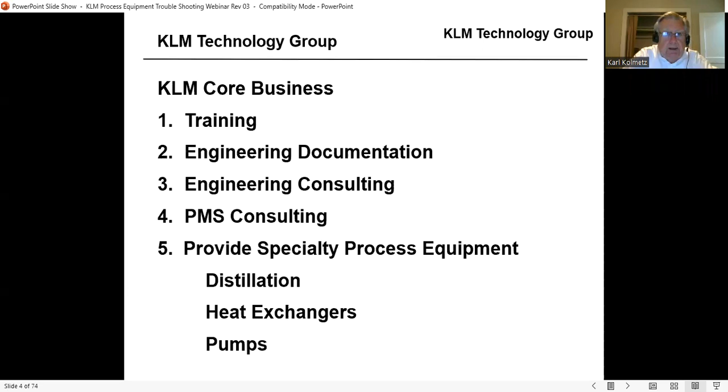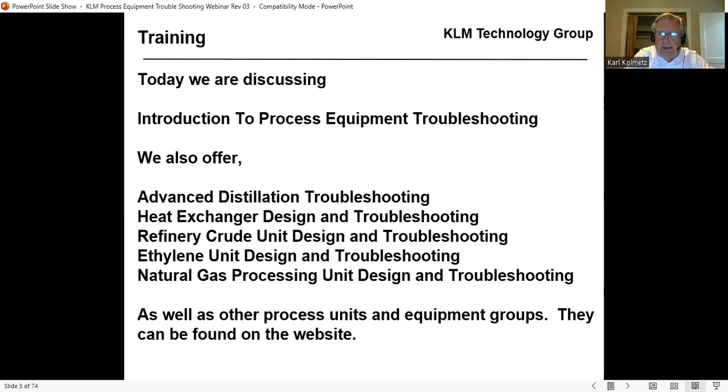What we're talking about today is some of the specialty equipment that we help provide. Today we're discussing an introduction to process equipment. We also offer other training courses: advanced distillation, heat exchanger design, refinery crude unit design, ethylene unit design, natural gas processing design, as well as other process unit and equipment groups. They can be found on the website, klmtechgroup.com. So what's our agenda today?

Safety, sustainability, distillation, heat exchangers, pumps, Q&A. Each one of these topics we've covered in our bi-monthly magazine with our great authors. We've been publishing for 7 years. I'm very honored that an amazing amount of people read the bi-monthly magazine. We publish it in multiple places, and we have great authors. If you're interested in writing an article, send us an abstract, and we'd be happy to help you publish in Engineering Practice Magazine.

Safety. First thing on the agenda, safety. HSE is the number one concern. No project or operation can be classified as sustainable, optimized, or excellent unless it's done safely, healthy, while minimizing environmental impact. We've made great improvements in safety in the last 50 years, and so everybody's really happy. We've really done great in HSE.

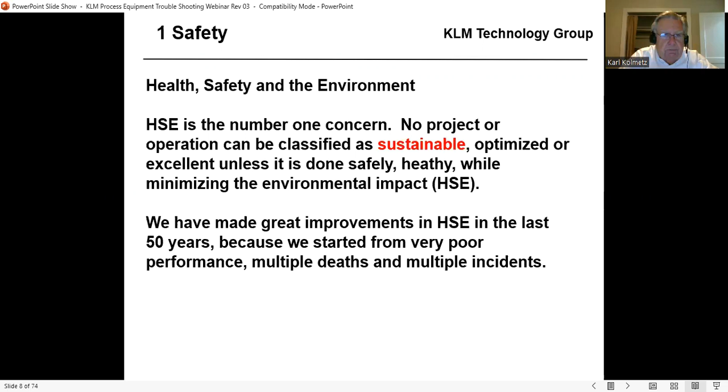But we started from such very poor performance. In the 70s, we had multiple deaths and multiple incidents, and we think we're doing so good in safety now. So we've gone from maybe an F, a failing grade, to an average C grade. We've done well, but there's still great opportunities for improvement. So we've come from such a poor place to where we're maybe an average student.

The parents are happy, but not really. We shouldn't be happy with C grades. We've done well, but there's still great opportunities for improvement. Let's continue to improve the efforts. HAZOPs—my complaint about HAZOPs is there's typically not enough senior people there. KLM has senior engineers with over 35 years of equipment design and operation experience who can review your operation and improve your health, safety, and environmental performance. So we've gone from an F to a C, but I still think there's work to do on safety.

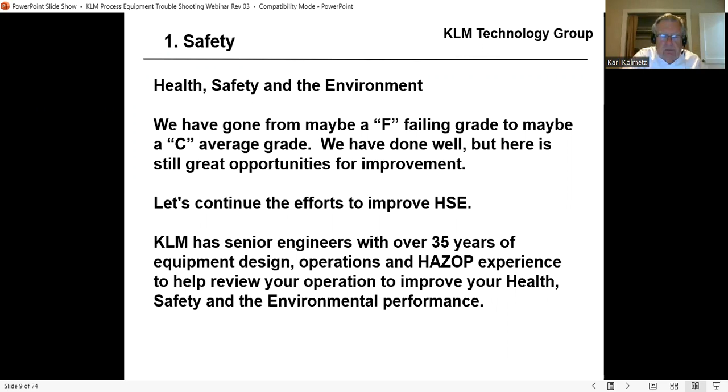Sustainability, process equipment troubleshooting. So let's talk a little bit about sustainability. That wasn't nearly enough about safety.

Sustainability is a societal goal that broadly aims for humans to safely coexist on planet Earth over a long period of time. The quality of causing little or no environmental damage and therefore able to continue for a long period of time. So these are some definitions of sustainability.

So what are some sustainability buzzwords? Green energy, which is wind, solar, and hydrogen. Electric cars. Blue energy, which is obtaining energy from the sea. Renewable energy, renewable kerosene and diesel, biodiesel, recycling, and conservation.

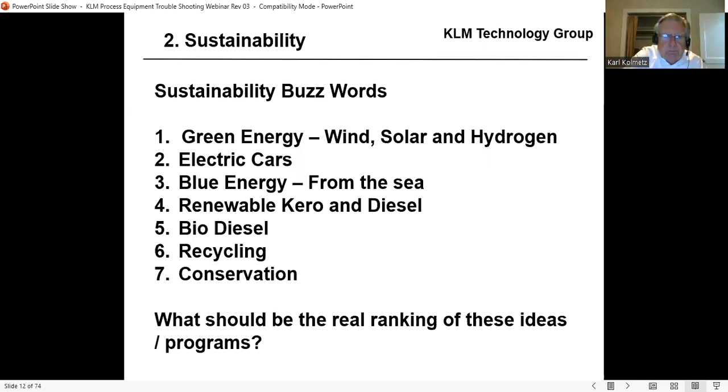What should be the real ranking of these ideas or programs? Well, I can tell you my opinion. How should these be ranked? So let's go back to the definition one more time. Sustainability is a societal goal that broadly aims for humans to safely coexist on Earth over a long period of time.

So in my view, sustainability, safety has to be number one, and I said it in the safety section. Number two has to be conservation. The bottom line is use less energy. And as engineers, that's our job, to design plants to reduce energy, use less energy, use less feedstock. If we use less energy and less feedstock, I don't need as much green energy or blue energy.

So to me, number one is safety. Number two has to be use less energy. All through this presentation, I'm going to talk about distillation, pumps, and heat exchangers and how to use less energy on each one of them.

Recycling, very important. Then green energy: wind, solar, and hydrogen. Blue energy from the sea. Renewable diesel and kerosene and biodiesel. And I put cars last because it's got some question marks beside it.

Every real engineering study that I've seen says we don't know the impacts yet on electric cars. You've got mining for the battery components, we've got battery recycling, we've still got to produce the electricity. So there's a whole big question mark: how sustainable is electric cars?

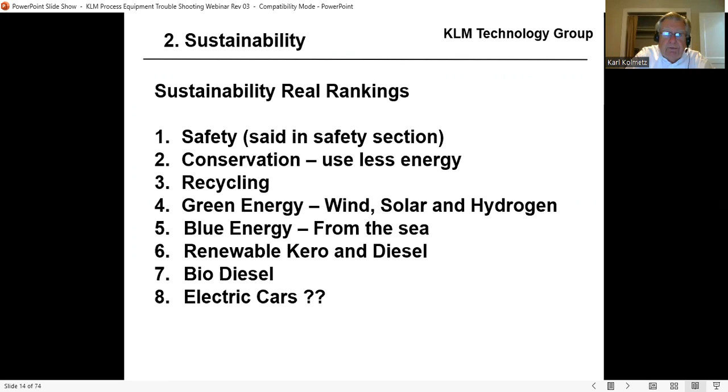But currently, green energy and electric cars tend to be the two hot things that we're talking about. Number one has to be safety. Number two has to be, let's just use less energy. Recycling, green energy, conservation is important.

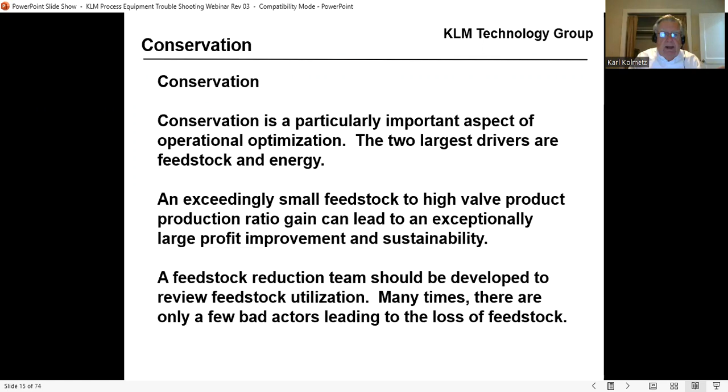Part of any process plant optimization, the two largest drivers are feedstock and energy. An exceedingly small feedstock reduction to high value products can lead to exceptionally large profit improvement and sustainability. If I use less feedstock and I produce high value products, that's important. For most plants, you should have a feedstock reduction team. Many times only a few bad actors are leading to the loss of feedstock to high value products.

Energy should be tracked weekly and monthly. Total energy should be tracked, energy per ton of high value products. The industry standard, every time I say this, people are surprised, the industry standard for major companies says energy is reduced 1 to 3% per year. What is your plant's current performance? The major companies are reducing energy 1 to 3% per year.

When I go to most plants, they have the same energy performance or they're getting worse. The best performing plants see yearly reductions of greater than 3%. And how do they do that? Well, I'm going to talk to you today in how they do that.

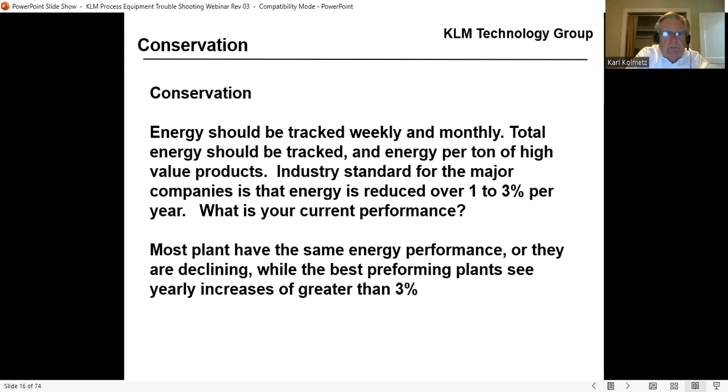So part of this presentation is how do you improve your energy, which is the main part of conservation and sustainability. Energy is a function of several items. Equipment design: I can design distillation equipment that is 10% more efficient.

Typically we buy vanilla type equipment. We don't typically buy the best efficient equipment because of cost, but they don't realize it's a small amount of cost difference. You make a huge amount in equipment, you make a huge amount in energy savings, plant reliability, motor power factors.

I was consulting for an EB styrene plant. One of the things when I go consult, I go back and track their energy for several years. So I'm at this EB styrene plant and the energy trended up over the last 5 years. And they had just bought low energy catalyst. I'm going, guys, something's wrong with this picture. You bought low energy catalyst and your energy's tracking up.

So I'm in the meeting and I'm asking, we're in Asia and Asians don't say much in the meeting, so nobody said a word. After the meeting, the electrical engineer comes to me and says, well, why energy's tracking up is we're buying very low cost motors, which have very poor power factors.

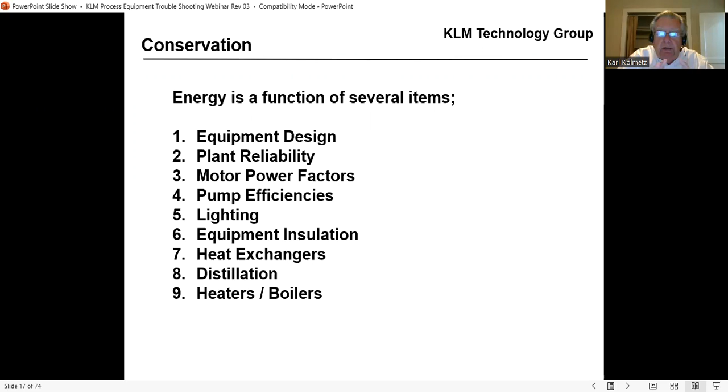So the first thing we need to do is look at energy. The best way to be sustainable is to use less energy. If your energy cost is increasing, you need to put together an energy reduction team. Just forming the team normally produces an energy reduction. It's amazing what increased focus can accomplish.

You need to review equipment design, particularly your heat exchangers, heaters and boilers, and distillation equipment to help reduce energy, often by just adjusting operating parameters.

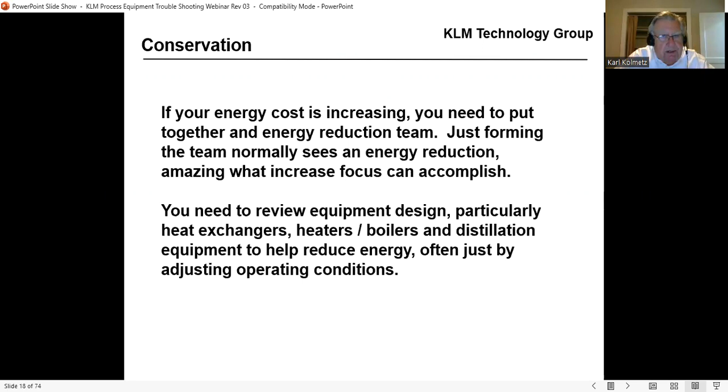Each time you replace a piece of equipment, you should improve the energy performance of that equipment. Don't just replace in kind. Go ahead, buy a better pump, buy a better motor. Every time you open your distillation column to inspect them, buy better trays. A 1 meter tray costs $1,500. It's not crazy money.

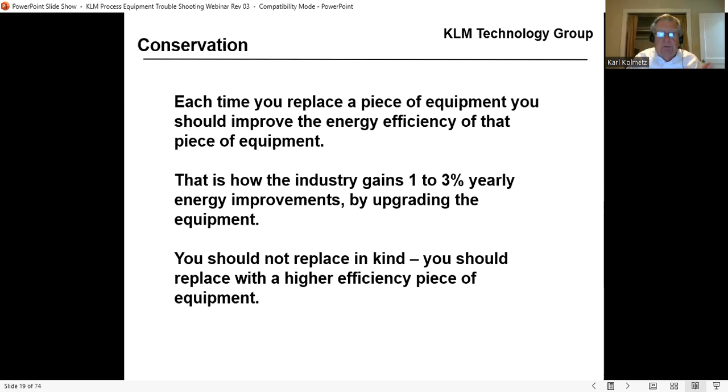This is how the industry gains 1 to 3% yearly by upgrading the equipment. You should not replace in kind. You should replace with a higher efficiency piece of equipment. We want to be sustainable. It also saves you money. So it's a double win - I make more money and I'm sustainable.

Your team should be taught to specify replacement equipment for increased energy efficiency, often with only a small cost increase. That's why they didn't do it from day one. But it has a huge return on investment, particularly when the price of natural gas is kind of high like it is now. Sometimes there can be a 3 to 4 month return on investment.

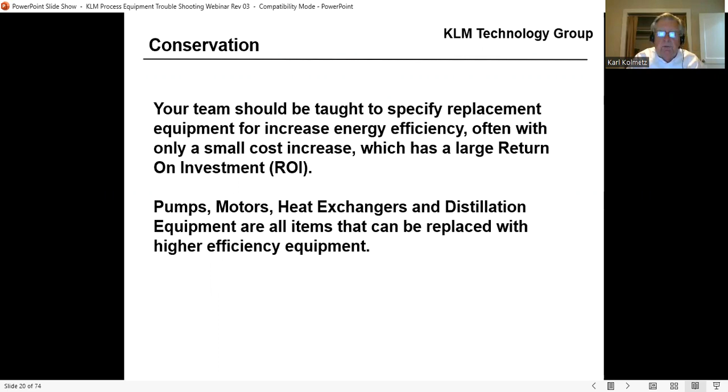Pumps, motors, heat exchangers, distillation equipment are all items you can replace with higher efficiency equipment. So for years we've lost the battle on this delta - for 3% more, I can buy a high efficiency piece of equipment. Back when natural gas was cheap, it didn't make sense. Today, when the price of natural gas is very high, when we're trying to conserve and be sustainable, that 3% now has a very large return on investment.

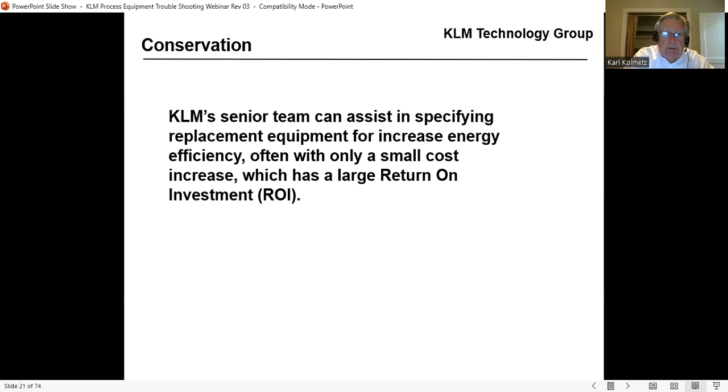KLM's senior team can assist you in specifying replacement equipment for increased energy efficiency, often with only a small cost increase, which is a large return on investment. So one thing you might want to do is have somebody look at your specifications when you're going out for bids. You need to specify a certain power factor for a motor, a certain efficiency for a pump, and in distillation a certain efficiency and a certain fouling resistance. These are things you should have in your specifications when you go out for bid. It's going to cost you a little more money, but it's going to pay back very quickly.

So we've talked about safety, we've talked about sustainability. Let's jump into distillation a little bit.

Distillation troubleshooting. Do the simple checks first. Look at temperature and pressure compositions. Let's talk about troubleshooting tools, and then let's talk about some tower inspections.

So you're going to call me to come do a troubleshooting. You've got a problem tower. The first thing I'm going to do is the simple checks first. Then I'll look at temperature, pressure, and compositions. I'm going to run a simulation, look at some troubleshooting tools, and then we might have to actually open up and inspect the tower.

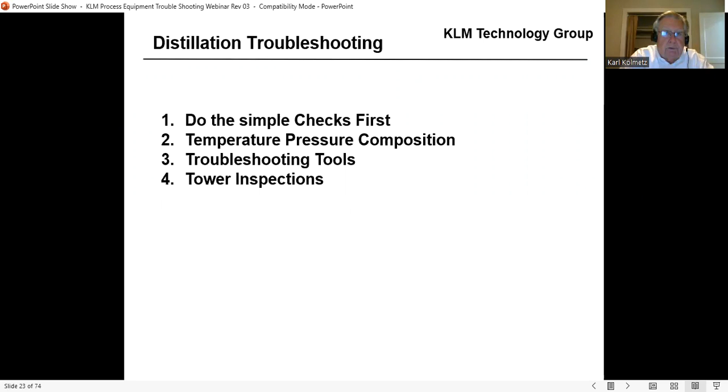So these are some distillation troubleshooting tools, but do the simple checks first. As engineers, we want to do a simulation first, but many of the issues with distillation are instrumentation related.

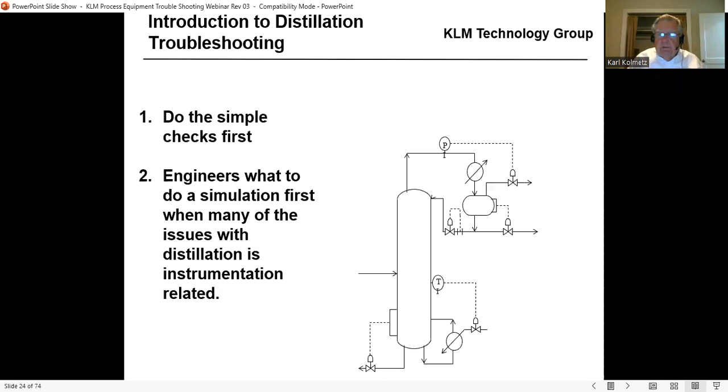So the first thing we want to do is verify the tower levels. We work with the operators to confirm the level. We go up on the overhead receiver. There's a sight glass right here. We can either open the overhead storage control valve or open the reflux, and this level should track down. We can go to this sight glass here and have them open the bottoms to storage, and this level should track down.

What percent of the time would you guess that when you go to a tower troubleshooting, they cannot find the tower levels? So I show up, and the first thing I'm going to go do is look at these two levels. What percent of the time would you guess they don't know where the levels are?

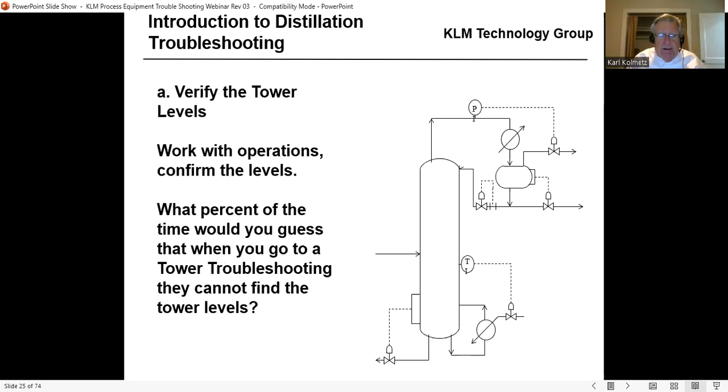Now everybody thinks levels are easy. Levels are not easy, and they're not very accurate. We're going to talk about that. In my career, 20% of the time when I show up and the tower's not working, it's always the tower bottoms level. If the tower bottoms level is higher, the reboiler will not function.

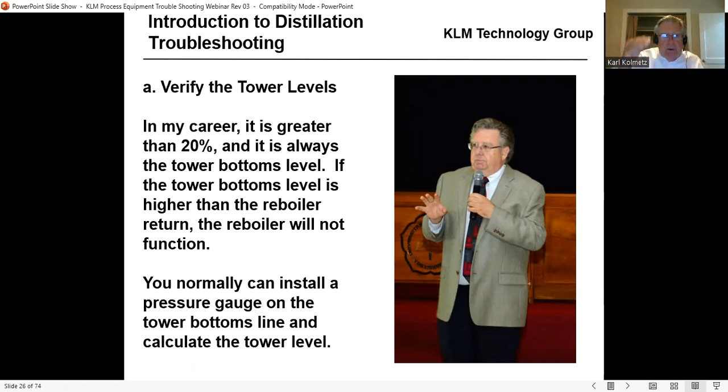What I normally do is put a pressure gauge on the tower bottoms line and calculate the tower bottoms level. You can take rho g h, and I can tell you how high up in the column it is. Usually it's above the sight glass, and they don't really know where the level is. So I put a pressure gauge on the tower bottoms line, calculate the tower bottoms level, how high it is, and we start lowering it down. When we get it below the reboiler return, the tower sometimes will start working.

So the challenge is the tower bottoms may be frothy and at a higher temperature than the level leg, because of Bernoulli's equation. If you go to a hot system, what's in the column is always higher than what's in the sight glass - can be 10 to 15%, I've even seen it 20% higher. So levels seem easy, but they're really not. If you've ever seen a movie of what the inside of a distillation column looks like, it's frothy, and that level in the column is going to be much higher than the level in the sight glass.

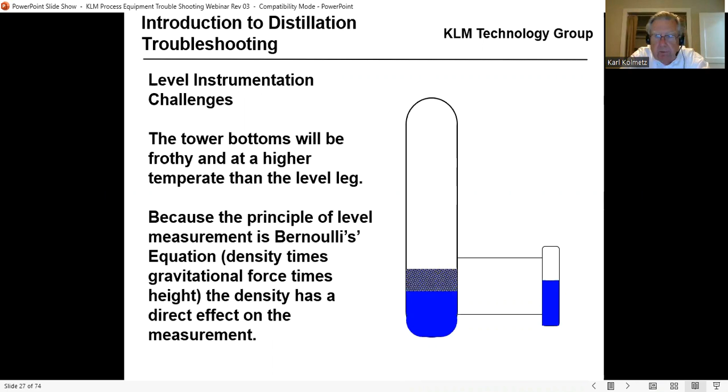Next thing I want to do is perform a tower pressure drop. If the levels are okay, let's perform a tower pressure drop. There are normally 3 places I can put a pressure gauge: one at the top of the bottoms level right here, one right here, and one on the overhead line. So I can put a pressure gauge in 3 places on this column.

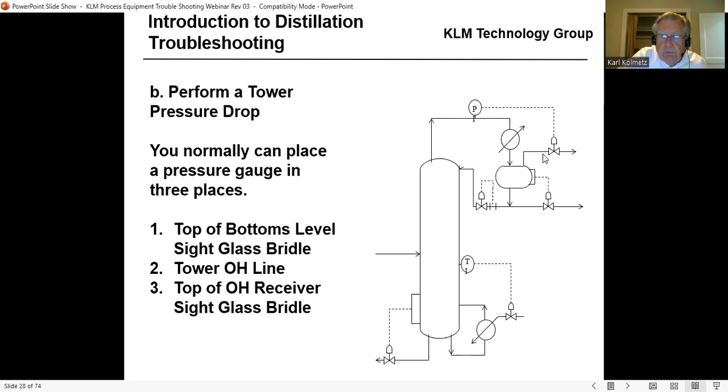This measures the pressure drop across the column. These two measure the pressure drop across the overhead condenser. You should use the same gauge, and one person should read the gauge - everybody reads gauges differently.

Typically, I go read the gauge. If I drop the gauge, you start over - you get a brand new gauge, go to the instrument shop, get it calibrated, carefully install it in the 3 places, and the same person reads the gauge.

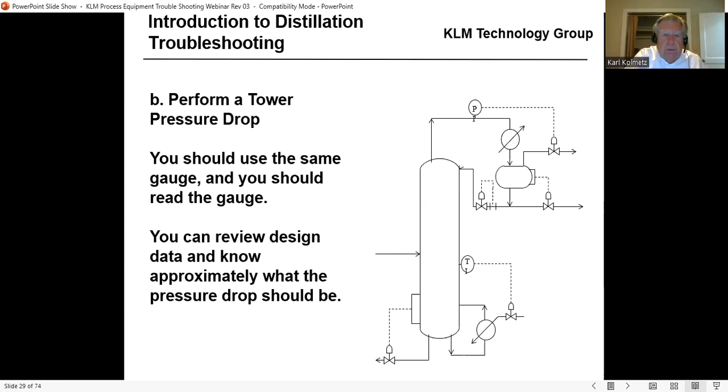In advance, you can review the design data and know approximately what the pressure drop should be. Suppose you have 30 trays and you're expecting about a 3-pound pressure drop, 0.2 bar. What does it mean if you have a high pressure drop across this column? Well, it could be fouling, could be flooding - your tray might have dropped down on another tray. What does it mean if you have very low pressure drop? Well, all the trays could be laying in the bottom of the column.

What is the normal design pressure drop of a heat exchanger? It should be about 5 pounds, 0.35 bar.

What does it mean if you have very high pressure drop across this heat exchanger? Well, that could be fouling. What does it mean if you have very low pressure drop across this heat exchanger? Well, what that normally means is you really don't have very much reflux, and this reflux meter may not be telling you the truth.

So this pressure drop can tell you a lot. It can tell you if the trays are in place, if the heat exchanger is fouled, or if maybe you don't have enough reflux. So perform a tower pressure drop.

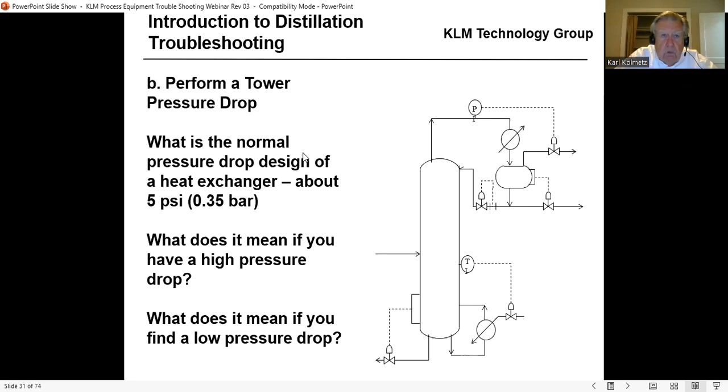In my career, about 20% of the time you can identify the problem with the tower pressure profile. Once you've identified there's a problem with the column, you can scan the column to get a better picture of what's happened inside. So run a pressure drop, and if it's much higher or lower than design, go get a column scan.

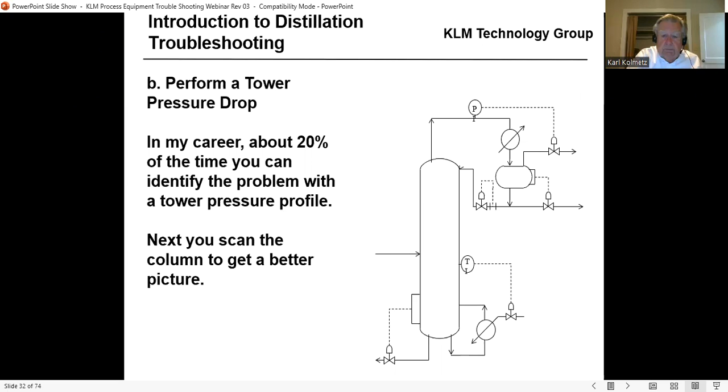Next thing I want to do is perform a tower temperature profile. You can take a temperature gun and survey the tower temperatures - the feed, the bottoms, the overhead temperature, the reflux temperature, the cooling water in and out, and all the others.

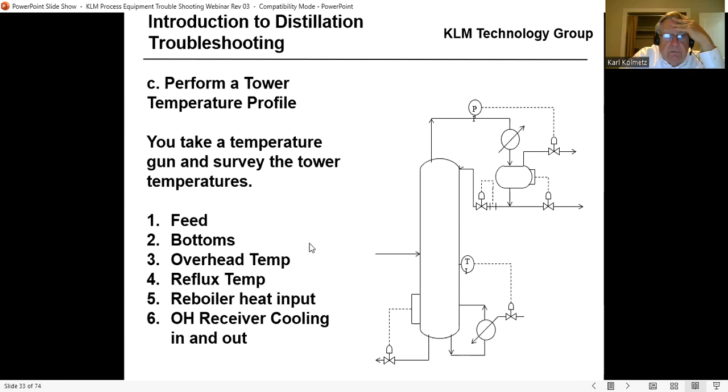What happens if your feed is much hotter than design? What can happen if it's much colder than design? Most of the time, if I'm designing a column, I want to heat this feed so 50% goes up and 50% goes down - about 50% flashed. If it's much hotter than design, I can flash a large part and flood this part of the column. If it's much colder, I make too much liquid and can flood this part of the column. So it's important that your feed be roughly what the designer designed it for. If he designed it for low temperature, he probably made these trays a little larger, or he should have.

What happens if your reflux is much hotter than design? If my reflux comes in hot - what I really want is for it to come in at a certain temperature, cool the vapor coming up, and go down the column. If it's hot, it comes in and just recycles through this overhead condenser and even makes it hotter.

What happens if your reflux is much colder than design? Well, if it's too cold, I can actually flood the top of the column here.

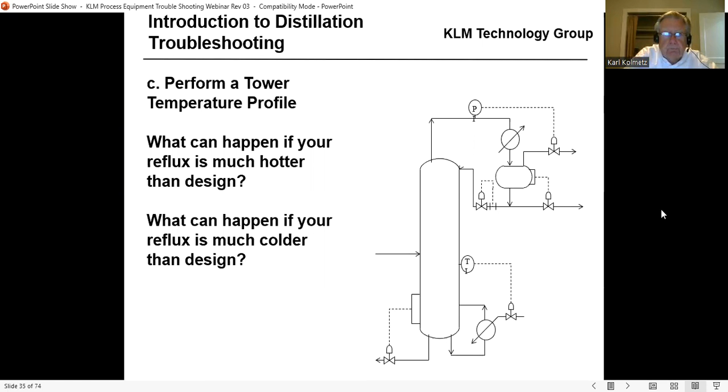What does it mean if your cooling water in and out are the same temperature? This can mean two things. Number one, this heat exchanger is fouled. Number two, it can mean, again, you have no reflux.

So we had a situation - I worked in a Houston refinery for 16 years, and we had a debutanizer column on the FCC, which took the C4s out of the gasoline. So it was a very important column. We did a turnaround, and coming out of the turnaround, the column no longer worked. So they did a whole bunch of troubleshooting.

They brought in a whole group of people, and it was decided maybe they needed to retray the column. So they shut the FCC down. They retrayed the column because they weren't making on-spec gasoline, which is kind of important, and started back up with the new trays. It still was not on test.

So I got interested in distillation. My boss asked me to go down and look at this column, so I went down and looked at it. A young engineer was walking around, and he noticed that this temperature and this temperature were the same. He also noted this control valve was not open very much.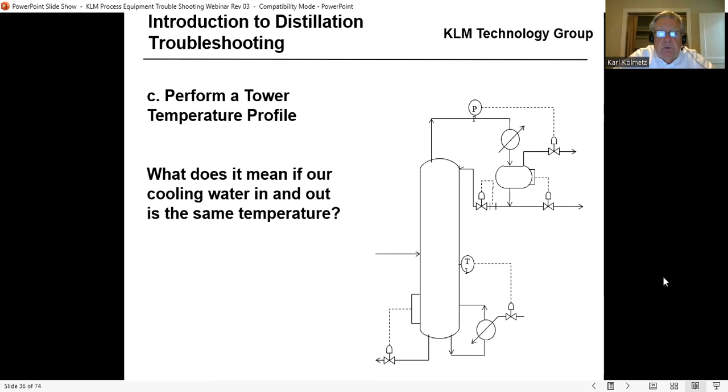So it's very important that you do some troubleshooting. Do the simple checks first - verify the levels, perform a pressure survey, perform a temperature survey.

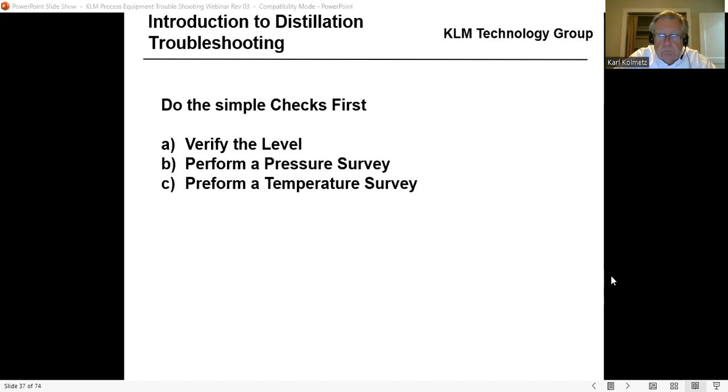All right, troubleshooting. So I've done the simple parts. I've looked at the feeds, I've looked at the levels, I've looked at the temperatures, I've looked at some of the flows. Then you go sample the feeds.

Has the feed changed from the design? Build a mass balance. If it's not within 2 to 5%, get your meters calibrated. A typical normal orifice plate is only 2% accuracy. The current micro motions are much better, but a normal orifice plate is only 2%, so try to build your mass balance to within 2 to 5%.

Then you go to performance simulation. Has the temperature and pressure profiles changed? Go look at hydraulic profiles.

I talked to you that we'd probably come back later and do a second part to this. In part 2, I'll come back and talk about hydraulics. I may do that in November.

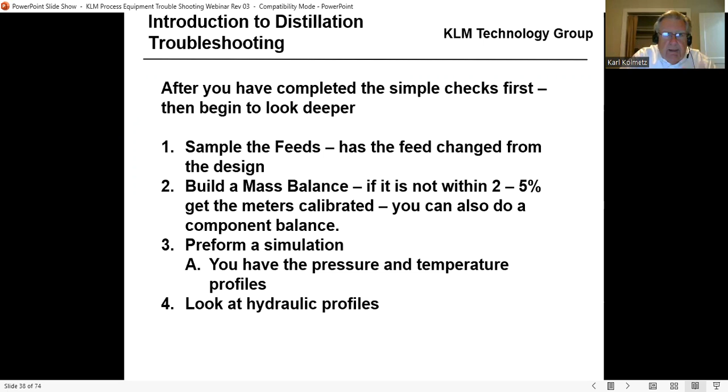Do the simple checks first: sample the feeds, build a mass balance, perform a simulation. So these are troubleshooting tools.

KLM is recognized as a leader in distillation equipment design, operation, commissioning, and troubleshooting. Typically a company will have a design guy, a guy that troubleshoots it, and a guy that commissions it - they'll typically have 3 different people.

I've been very fortunate. I've gotten to do design, operation, and troubleshooting. So I will show up and bring my 40 years of experience to you. Typically a company might have to send 3 people to do troubleshooting, whereas I'm probably going to bring that much experience with me.

We can provide process studies, we can do engineering operations trainings. Really each one of these subjects should be a 3 to 4 day class - distillation, heat exchangers, and pumps. Each one of them should be a 3 or 4 day class.

Tower inspections - I've probably climbed through 100 towers in my career. Distillation replacement equipment - we don't replace in kind. If you're going to replace equipment, always replace with something more efficient. Commissioning assistance - me and my team, I've got a really good team in Malaysia, we will come and help you commission units.

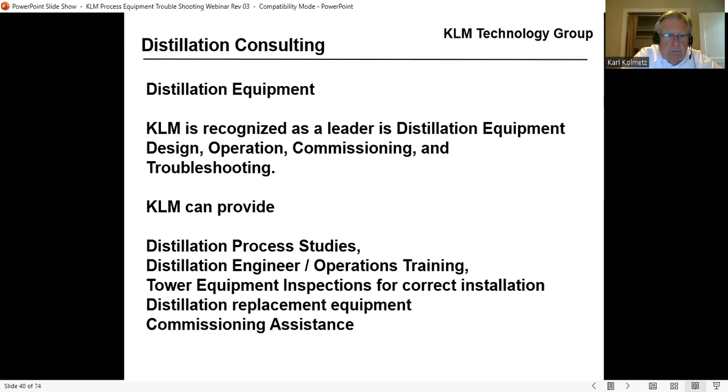What are the major equipment issues? Well, in my career, incorrect installation has been huge. If I don't install it correctly, it's not going to work.

The challenge is that very few people really know how they're supposed to be installed. I've actually gone behind the majors and corrected some of their mistakes. Even the major companies, major distillation companies, have installed them wrong.

Operation - what are equipment mistakes we make? We over reflux. I walk into most units and they're using too much reflux. If I'm using too much reflux, I'm using too much energy in the reboiler. And then high pressures - if I walk into most units, you can lower the pressure on most columns. If I lower the pressure, the relative volatilities get better, and you end up having less energy and better recoveries.

The third major issue is we buy low efficiency equipment. A 1 meter tray costs about $1,500. What costs the money in distillation is the foundation, the tower, the overhead lines, the overhead condensers, the pumps, the electrical, the instrumentation. That's what's expensive. What does the work is the tray. We want to save money on the tray - don't save money on the tray. Go save money on all the other pieces.

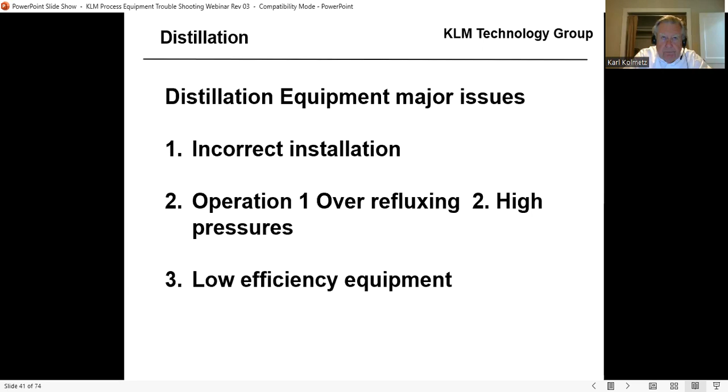Tower inspections - a large problem in many is incorrect installation, leading to loss of product quality, higher energy, and run length and plant reliability issues. So basically, if I don't install it correctly, I'm going to have loss of product quality, higher energy, and shorter run lengths, which can be a $1 million effect in a large plant. Not installing it correctly can be $1 million.

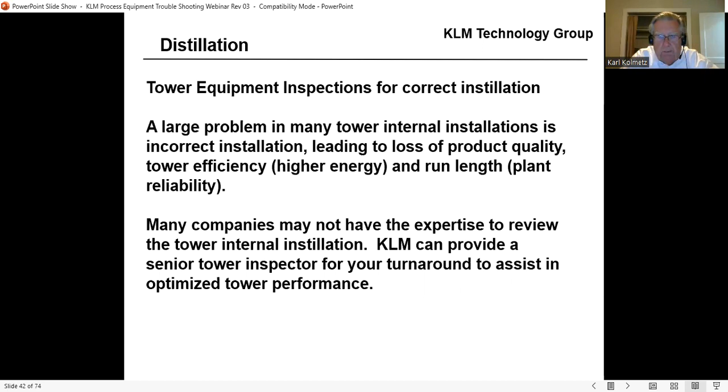Many companies do not have the expertise to review tower installations. If it's a large unit, I'm going to show up - I'll bring one of my senior guys from Malaysia with me to assist your tower performance. What are things we're going to look at? We're going to look at the downcomer clearance, the free area, top width, bottom width, all of these things.

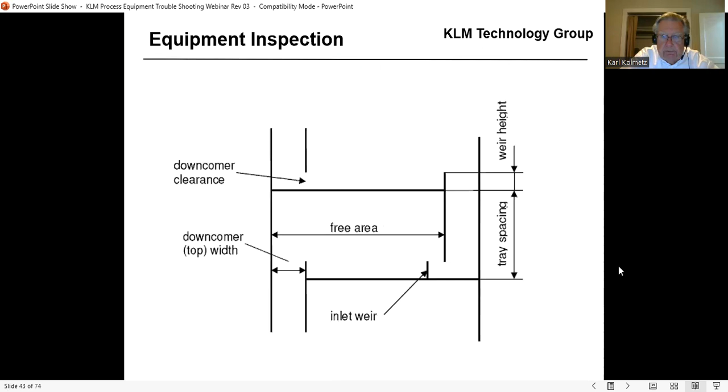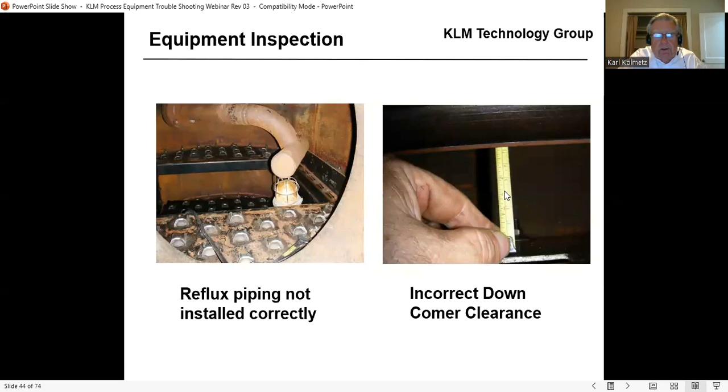This is my hand - I took this picture and I'm measuring the downcomer clearance. That's just something you've got to do.

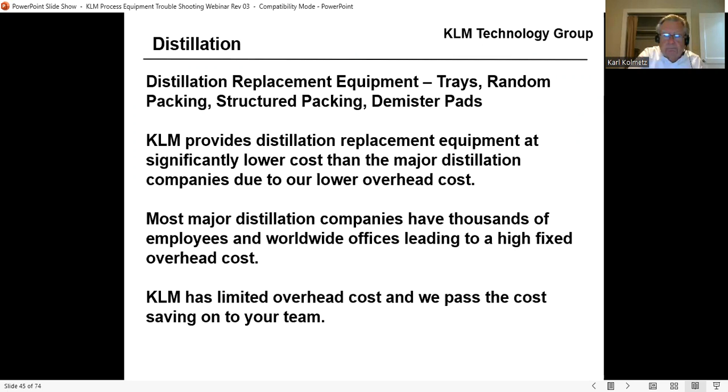Distillation replacement equipment - trays, random packing, structured packing, demister pads. KLM provides distillation replacement equipment at significantly lower cost than the major distillation companies due to our lower overhead costs. Most major distillation companies have thousands of employees in worldwide offices, leading to a high fixed overhead cost. KLM has limited overhead costs, and we pass the cost savings on to your team. We provide the same specification trays, random packing, structured packing, and demister pads, as well as a senior engineer, typically me, to review the selection.

If your current system has short run lengths, should we consider a more reliable replacement? Maybe a more fouling resistant or a stronger design. These are typical crude unit trays, and they should probably be a little more fouling resistant. These are not fouling resistant designs, and they're also probably not strong enough.

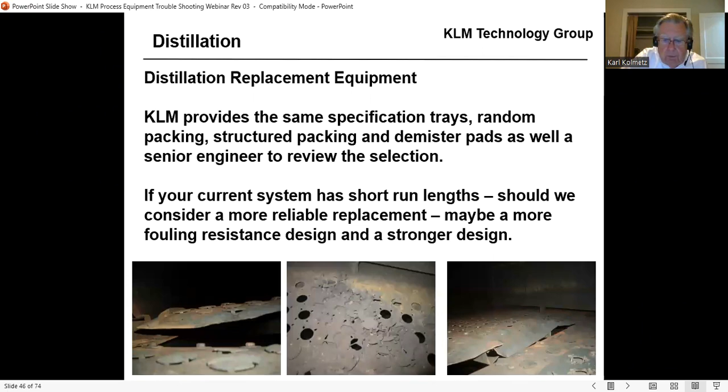Stronger and more fouling resistant designs are very important for random packing and demister pads that have high fouling failure rates. Alright, let's talk about this for a second.

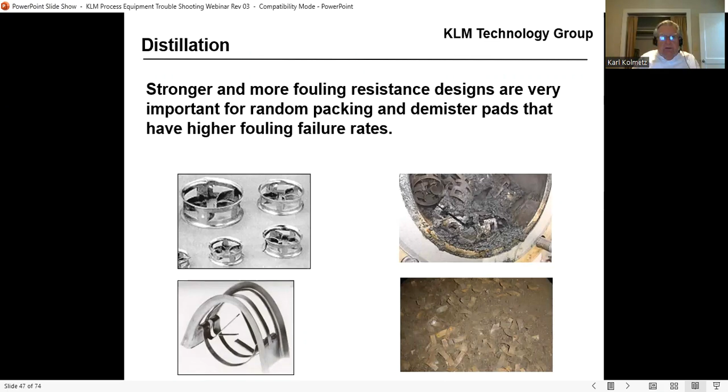Here's an ethylene plant case study. A plant in Malaysia opened their quench oil tower and found the random packing had disintegrated, causing very high pressure drop and fouling. Why did this happen? They obviously had some rings - that picture shows all the rings disintegrated, and the fouling happened because once the rings disintegrated, it acted like a filter for the coke fines from the ethylene furnace. Of course, you had a really high pressure drop, and you had to shut the column down. This is a $1 million problem for a large ethylene plant.

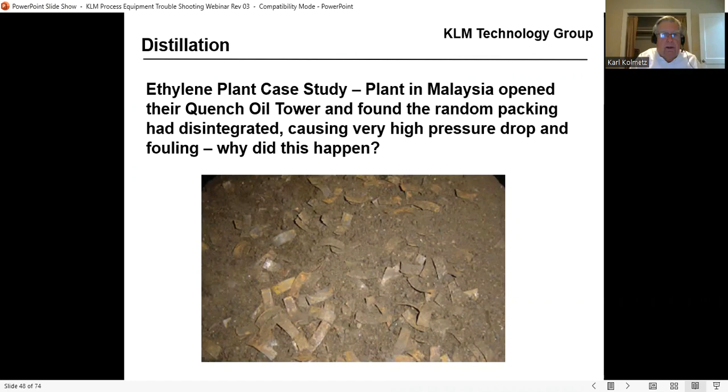One cause might be galvanic corrosion. The packing was stainless steel and the tower was carbon steel. Always consider galvanic corrosion when you're designing with multiple metallurgies.

So if I've got a quench oil tower or a quench water tower, you probably don't want to put stainless steel packing with a carbon steel wall. If you do, this is what's going to happen.

The licensors, the very first time you buy the column, will typically put carbon steel packing in, and then the vendors will come back behind them and sell you stainless steel. So typically the ethylene vendor's first batch of packing will have a carbon steel wall and a carbon steel packing. When you replace it, the vendor's going to try to sell you stainless steel. Unless you understand galvanic corrosion, it's not going to last very long.

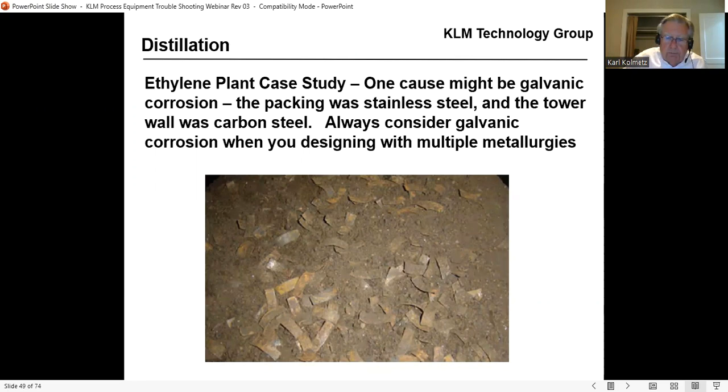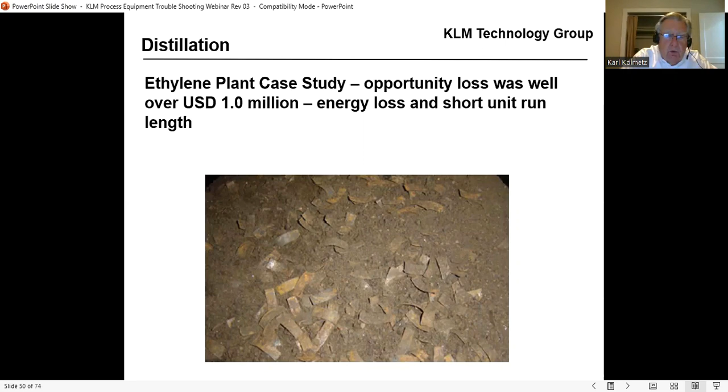Opportunity loss was well over $1 million for this ethylene plant. You had high energy losses and short run lengths. So you need to think about galvanic corrosion whenever you're doing mixed metallurgies. If you have water, low pH or high pH, you're going to have galvanic corrosion.

Gas processing case study. This is a picture of fouling in an amine column. This tower was packed with Pall rings. Pall rings have low efficiency and are not fouling resistant. Why would you pick a low efficiency ring with high surface area in a fouling system?

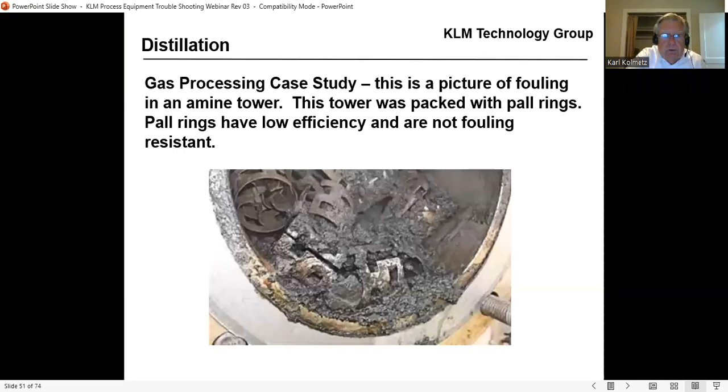So this was a poor choice of random packing. The opportunity loss is not as large as the ethylene plant, but why would you choose a low efficiency and a not fouling resistant packing?

Typically this is IMTP type packing. It has been tested independently and has much higher efficiency. It might even be the same cost, might be a little more, but you're going to get much higher efficiency with IMTP. Amine systems are going to foul no matter what, but you might as well pick a high efficiency packing. Don't pick a low efficiency packing.

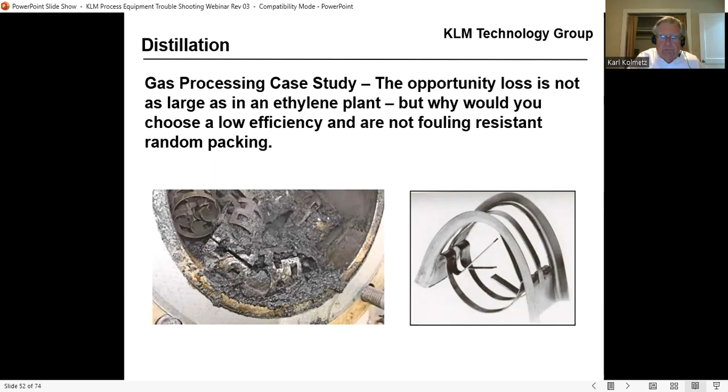For demister pads, it's important to understand the failure cases. KLM can provide equipment designed stronger with higher fouling resistance and longer run lengths. We quote a lot of demister pads. And I have a question.

Why should a caustic tower, which has a carbon steel shell, have a stainless steel demister pad? Most every caustic tower I go to, they're going to have a stainless steel demister pad. It probably should be some kind of polymer instead.

We know stainless steel and caustic are not compatible. It's just going to leave. You're going to get galvanic corrosion extremely bad. You're going to get caustic stress corrosion. So again, if I'm going to specify a caustic tower, I'm not going to specify a stainless steel pad, but most caustic towers I walk up to have stainless steel pads. So people aren't understanding this metallurgy, caustic versus galvanic corrosion, caustic attack. So make sure.

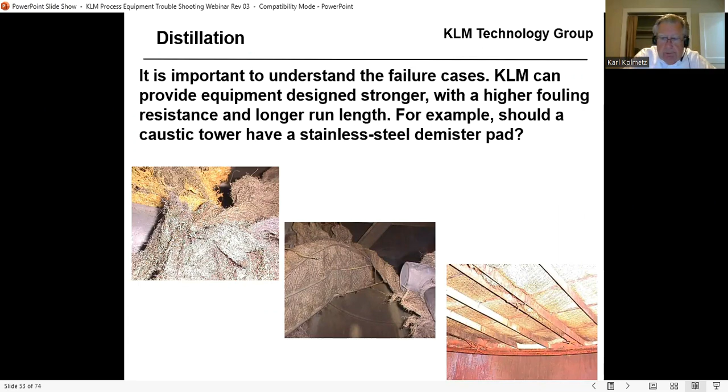The other thing I would do when I design a demister pad: the bottom 100 millimeters, I'm going to have a little thicker wire with larger openings. The top of the demister pad, I'm going to have very small openings. The bottom will have a little bigger mesh so it'll last longer, and that doesn't cost a lot of money.

So don't put stainless steel in a caustic tower. And if you are going to buy a demister pad, put the bottom 4 inches, about 100 millimeters, with bigger mesh, and the top mesh thinner. KLM quotes a lot of demister pads, we've got a really good team to do them, and we try not to make the metallurgy mistakes, and try to make it more efficient and last longer.

Okay, so I got some more questions. Let's see.

Recording also, I'm in the office, I'm not able to listen properly. Okay, what we'll do, we're going to put this up on YouTube when we finish.

Question: should we install an impingement baffle on the reboiler return? Is that applicable? The impingement plates reduce erosion caused on the side of the shell. Yes, I would. I like impingement plates on the reboiler return, particularly if you're causing erosion on the side of the shell.

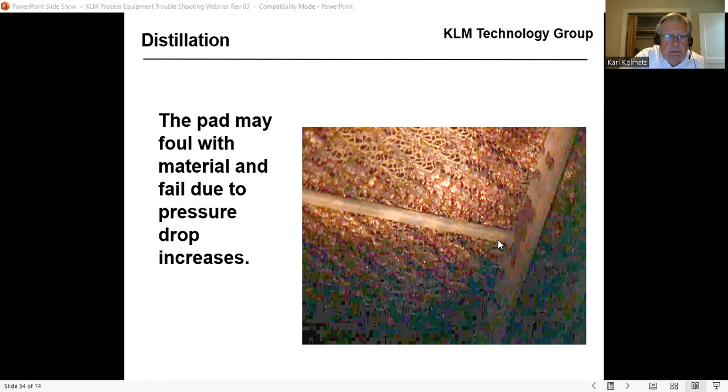Have you ever had a desalter trip due to high amp draw because of high conductivity of crude? We see in our plant, crude comes in with high emulsion, just wondering. Typically, that's normal - you have to control your pH so you can keep the conductivity down and keep your emulsions down.

I have a whole one hour presentation on desalters, and I've thought about doing a webinar on desalters with a certificate of attendance.

What you do to avoid galvanic corrosion in the columns is you use the same metallurgy. So if I have a stainless steel column, I can use stainless steel packing. If I have a carbon steel column, I have to use carbon steel packing. Now, the vendor doesn't want to sell you carbon steel packing because it's a pain for him, but he can do it. If he won't do it, KLM will provide you carbon steel packing.

It's not as important if you don't have water, if you don't have polar issues, because you need that ionics to get galvanic corrosion.

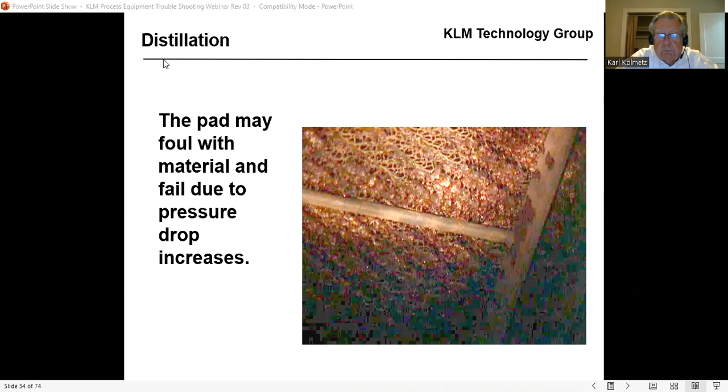Keep going. Distillation requirement: if your current system has acceptable run lengths and lower fouling potential, you should consider a high efficiency device to improve energy. If you replace your trays, heat exchangers, pumps in kind, you will not be gaining the 1 to 3% energy reductions, increased plant reliability, and product quality.

For distillation, we can give you 10% more efficiency, so you use 10% less energy. We can also give you better product purities. And trays are not expensive - trays are about $1,500 for a 1 meter tray.

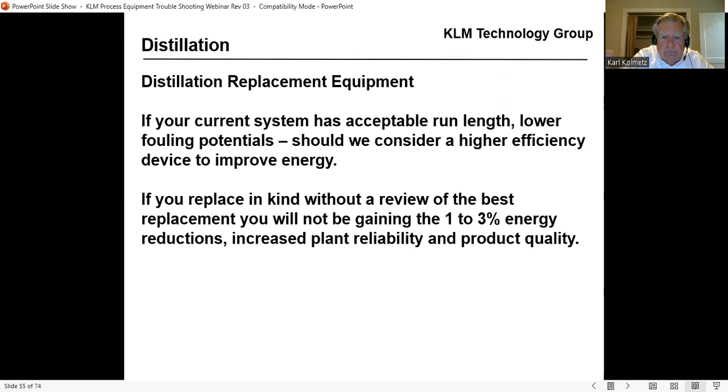Compared to a conventional sieve deck, which most of you have, a high efficiency tray can see greater than 5 to 10% efficiency gains, as well as 20% capacity gains. Distillation can be as much as 50% of a plant's total energy, particularly in a refinery.

So if I can gain 10% just by replacing the trays, I can reduce the plant energy 5%. And it's not expensive - a 1 meter tray costs about $1,500. So this is a tremendous return on investment.

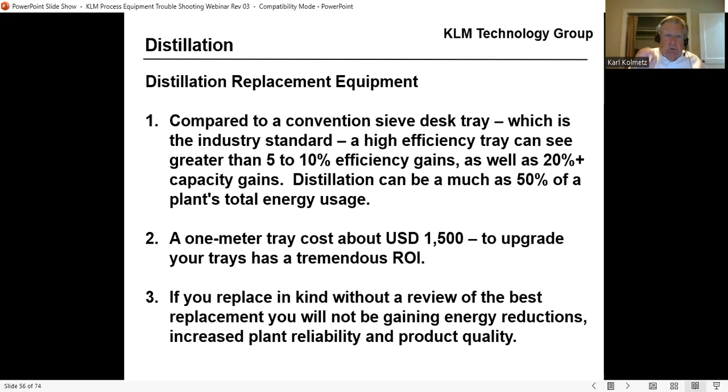If you replace in kind without a review of the best replacement, you'll not be gaining energy reductions, increasing plant reliability, product quality, and you won't be sustainable. So whenever you replace a piece of equipment, do not replace in kind. We've talked about safety, we've talked about sustainability, we've talked a little bit about distillation. I've not covered heat exchangers or pumps very much here.

I'm going to go through these quickly. We'll talk a little bit about heat exchangers, a little bit about pumps, and then we've got a few more Q&A questions. I've been answering the Q&As as you go along.

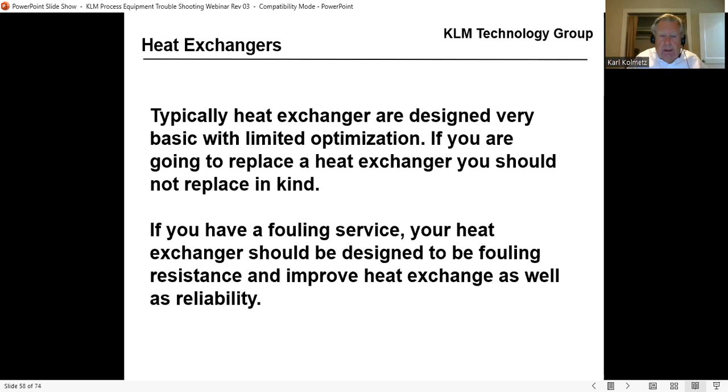If you have a fouling service, your heat exchanger should be designed to be fouling resistant and improve heat exchange as well as reliability. Almost every fouling service heat exchanger that I've seen is not designed very well, and I'm going to explain to you why.

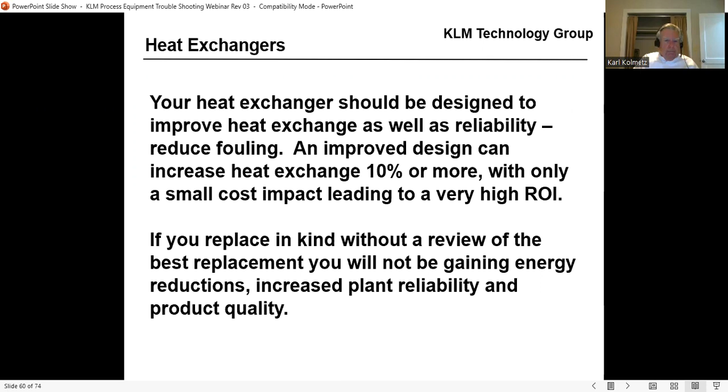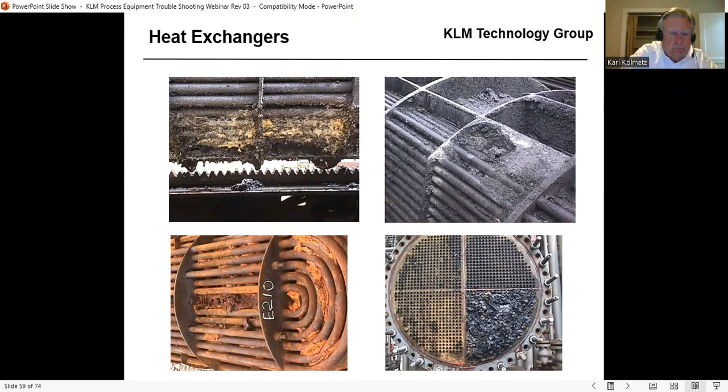So basically, we put baffles in for two reasons. Number one, support the tubes. Number two is to make this flow.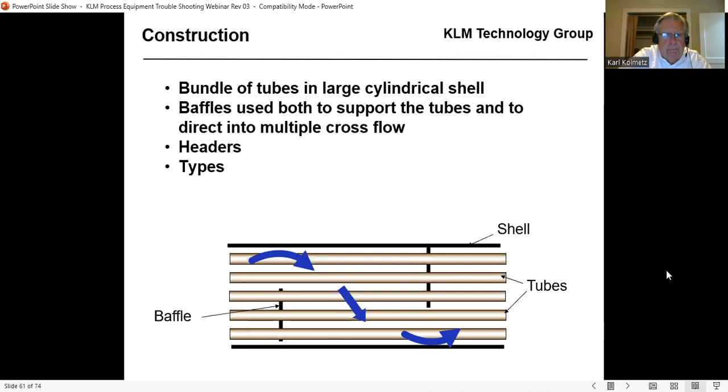But I can tell you, if it's fouling, I'm going to build all kinds of solids right here. So I want a small amount of flow through here, under this bottom, to remove those solids. At the start of the run, it's not going to be as efficient, but over the life of the run, it's going to be way more efficient. So that's kind of what these baffles are for.

And so I come here, flow goes under, flow goes over, but where the flow goes over, right in here, is a dead zone. If you've got high fouling, it's going to build up right here, right here, right here.

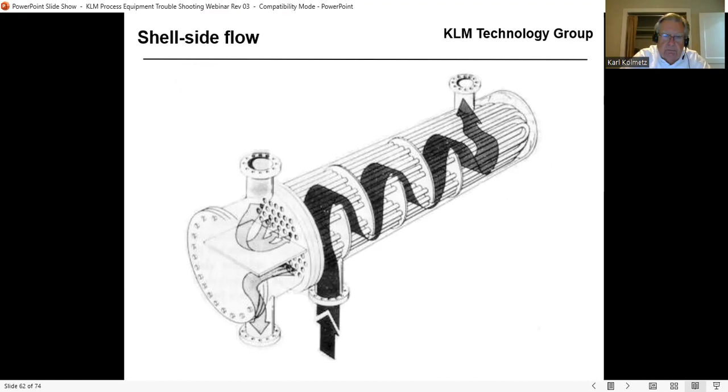And so the obvious answer is you don't design them like this. It's very important how you design the heat exchanger. That one heat exchanger picture obviously had 15 to 20% less efficiency, just from not designing properly.

These are ugly pictures, that's the only thing I know to say. Under this, I should have some V notches here, obviously. I know these are from an ethylene quench oil system. You know they're going to have fouling, you know they're going to have all kinds of tars, you know they're going to have fines, and you don't design traps for them.

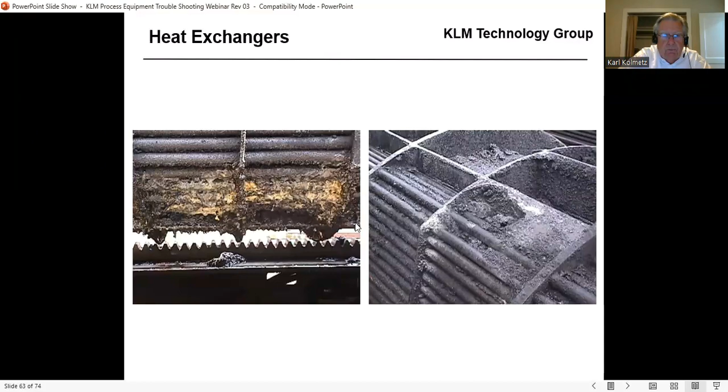So if you're looking at heat exchangers, typically, how do you design a heat exchanger? The process engineer designs for 120% of flow. Typically, a mechanical engineer can come behind you and add another 20%. So your typical heat exchanger is designed for 140 to 144% of design flow. If you're running at 80% of design, we may be in the laminar flow regime.

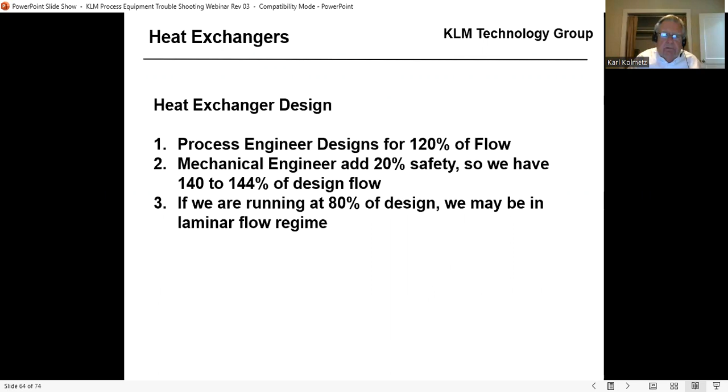Because you're running almost half. What happens if I run into laminar flow? Well, we know what happens if you run into laminar flow. My heat duty and my heat transfer coefficient is going to be significantly reduced.

So how do you fix this problem? I know if I'm running significantly lower flow rates, first off, we've way over-designed the heat exchanger because they want to put that safety margin in case they've made an error. And then if we run it low, I run into laminar flow. As soon as I run into laminar flow, I've got 40% loss of heat transfer.

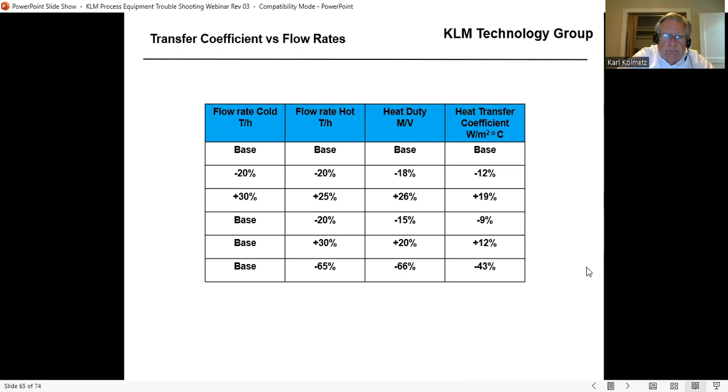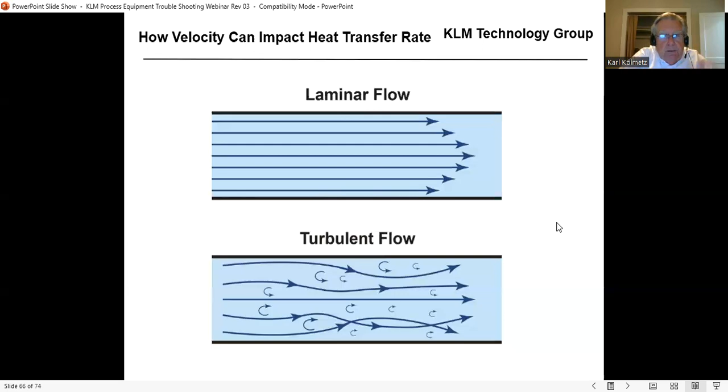As soon as I run into laminar flow, I want turbulent flow. As soon as I run into turbulent flow, I've got this extra flow here, I've got this extra heat exchange here. So we know this, everybody knows this.

So there's several ways, and I've done this a couple of times. I've come in, I've looked at the flow, I've looked at the area, I've looked at velocity. If it's laminar flow, I've come in and reduced 5% of the tubes, just plug 5% of the tubes. Add some inserts. Some inserts are better than others. There's a particular brand of inserts I don't like.

So you need to perform a study. There's a certain brand of inserts that have failed a lot, so that's something you need to know. You need to perform a study. I can't remember the names, I just know what I like and I don't like. You need to perform a study, determine: are you in laminar or turbulent flow?

The next turnaround, you may want to reduce some tubes, plug some tubes. You may want to cut some baffles. The next time you buy a heat exchanger, don't just buy a replacement in kind. Go look at what you're doing.

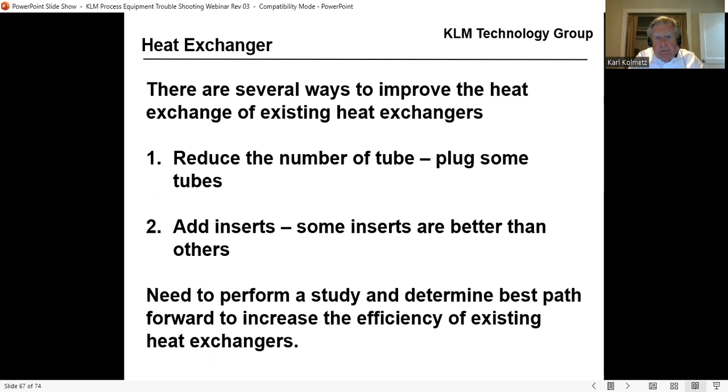If you have pictures that look like these pictures, you're not doing a good job on heat exchanger design. KLM has a senior team. The last 5 years, we've probably designed 30 heat exchangers and supplied 20. Because we supply many heat exchangers, we can provide a higher efficiency, better designed heat exchanger at the same cost you're currently purchasing.

The minimum you should do is have KLM review your designs. If your pictures look like that, you need to do something different.

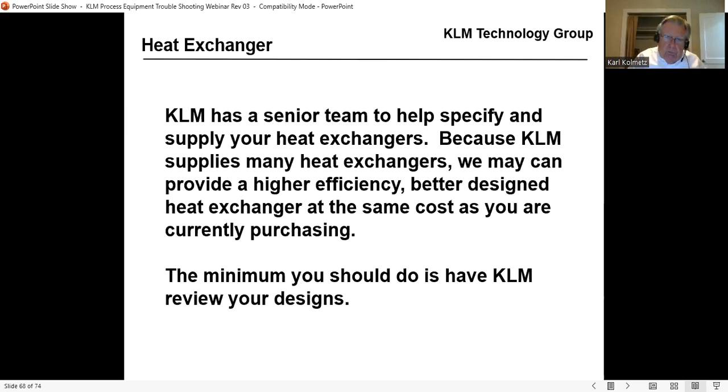So we looked at safety, sustainability. The best thing for sustainability is to reduce energy. We just talked about how to reduce energy in heat exchangers. We talked about how to reduce energy in distillation. Let's talk about pumps. I'm actually out of time already, but let's talk about pumps for a second: pump design and troubleshooting.

Current pump designs have higher efficiencies due to CFD modeling. If you're going to replace a pump, consider increasing its efficiency. Older pumps and motors might be 75% efficient, while newer pumps are greater than 90%. This is how the majors are getting 3% energy reduction. There will be a small cost impact, but it has a huge return on investment.

So you look at the motors, you buy a high power factor motor, you buy a high efficiency pump. Again, the minimum you should do, if you don't want to buy through KLM, is have us review your specs. There's simple things you can do in pump design, and simple things you can do in motors. You just specify them correctly.

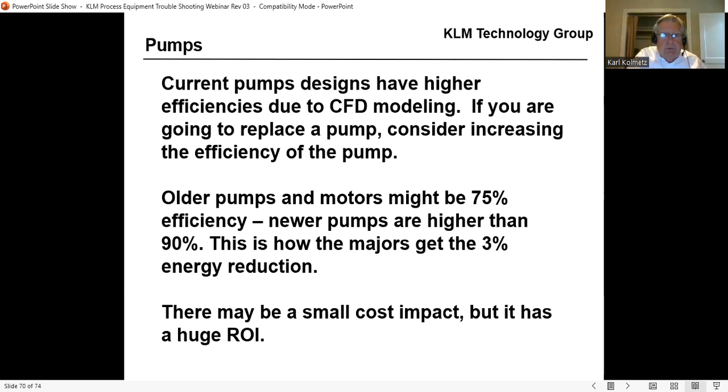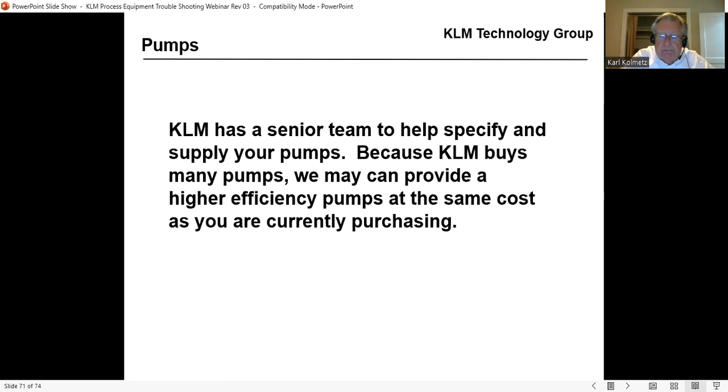We've probably done 20 pumps in the last 5 years, so we're buying 20 pumps while your plant's probably buying 1 or 2 a year. We can probably provide that pump cheaper than you can buy it. We have a senior team to help specify and supply your pumps. Because we buy many pumps, we can provide you higher efficiency pumps at the same or lower cost than you're currently purchasing. So look at KLM for distillation equipment, heat exchangers and pumps. The minimum you should do is let us look at the specifications.

So what have we talked about? Safety. We're a C student at best on safety, but we've come from an F. We've come from horrendously poor safety to average safety. We need to keep pushing in HAZOPs, in process studies, more ways to improve safety.

Sustainability. The best thing for us to do in sustainability is use less energy. We can use less energy in distillation, in heat exchange, and in pump design.